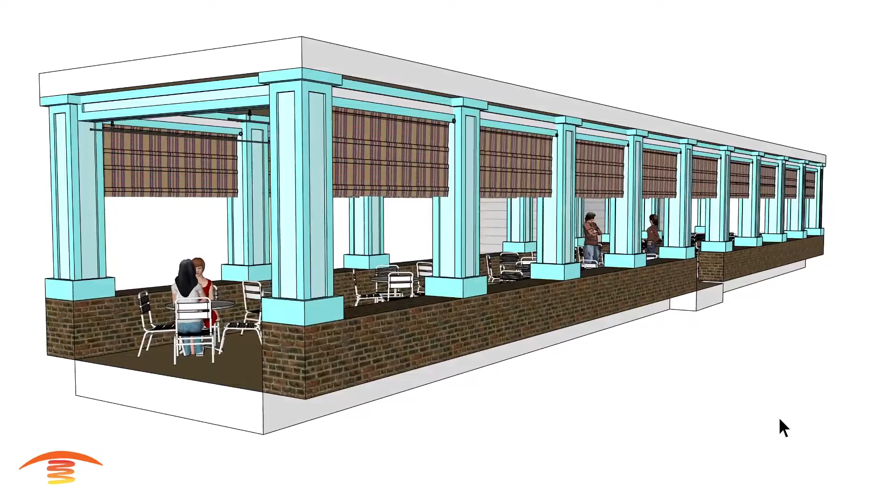Now let's get heating. Alright, so this is a commercial application. You can see this is a restaurant outdoor dining space. We have a couple of things that we want to be aware of. We have some drop-down drapes that come down, and I think it helps protect it from the snow. This is a location back east, and there is snow in the winter time here, and it gets very cold.

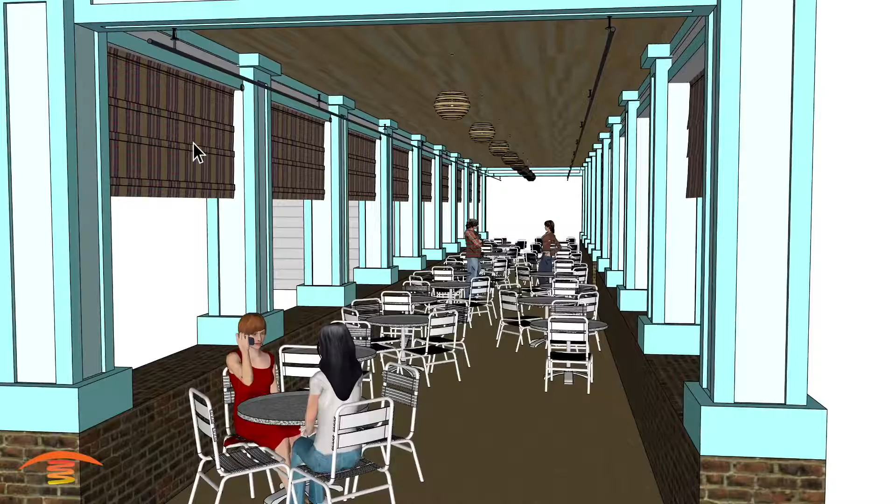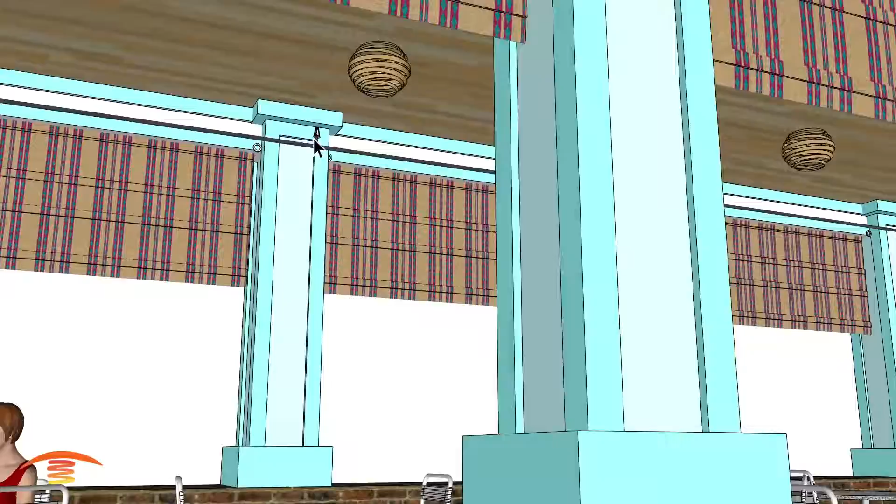So I imagine that this also acts as a source of insulation. We do have some fire retention sprinkler heads up here, and also over here. And then we have some lamps located down the center. My lamps are a little bit different than what theirs actually are. I do have these lamps centered within the post right here. The reason I'm showing that is because they actually might be centered over here, so we would have to just shift everything over.

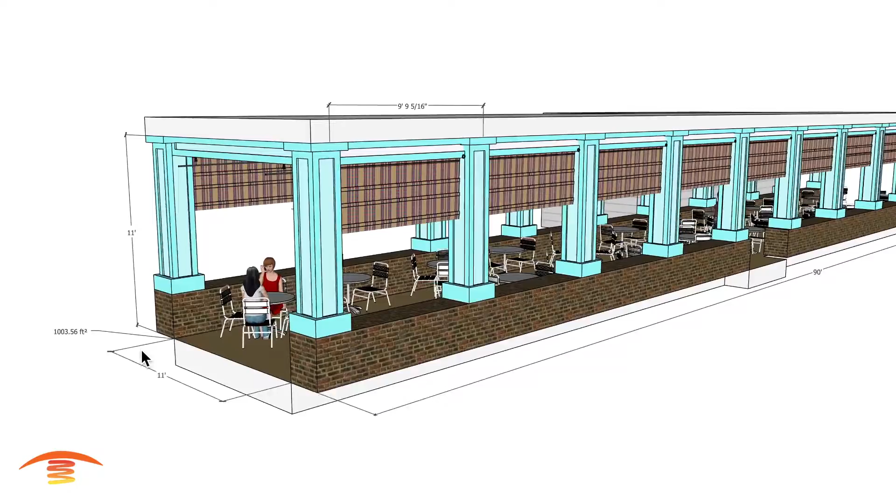Let's go ahead and look at the overall dimensions that I have here. Oops. So overall dimensions I have is 11 feet wide by 11 feet tall, and it's 90 feet deep this way. So it's a total of about 1,000 square feet. When you're heating up 1,000 square feet, you want to do as much as possible with as little as possible. And so my first recommendation is going to be to utilize a gas unit.

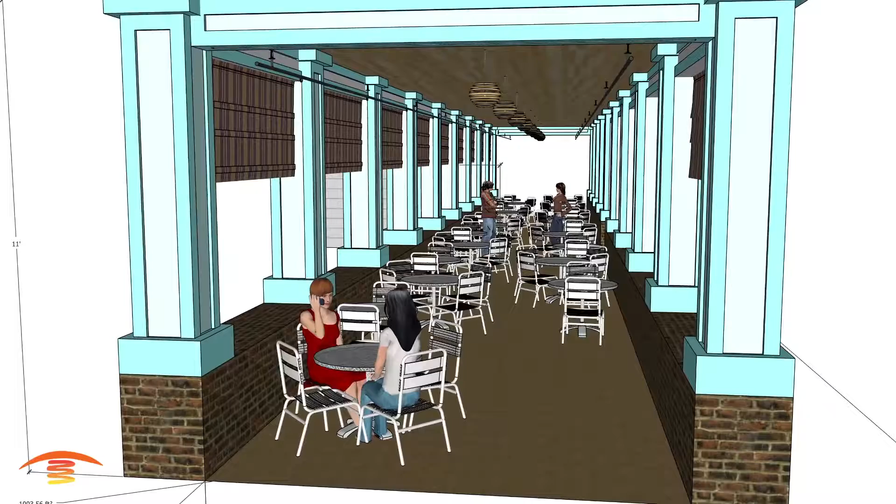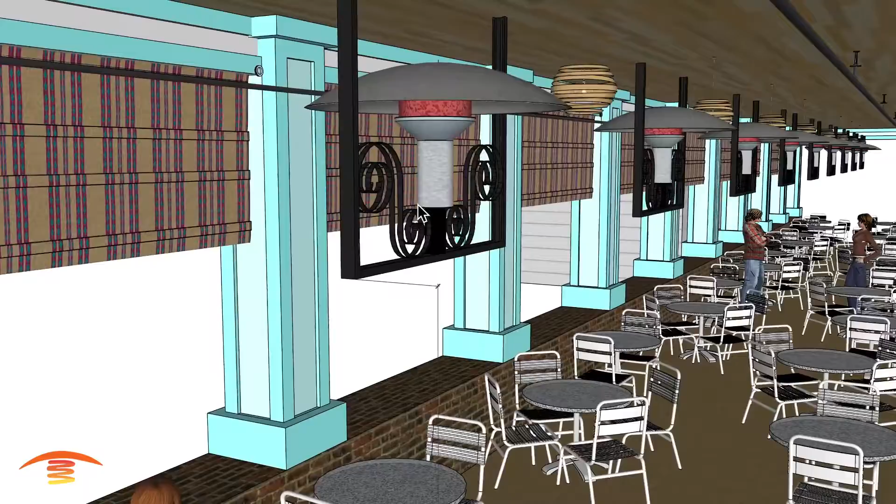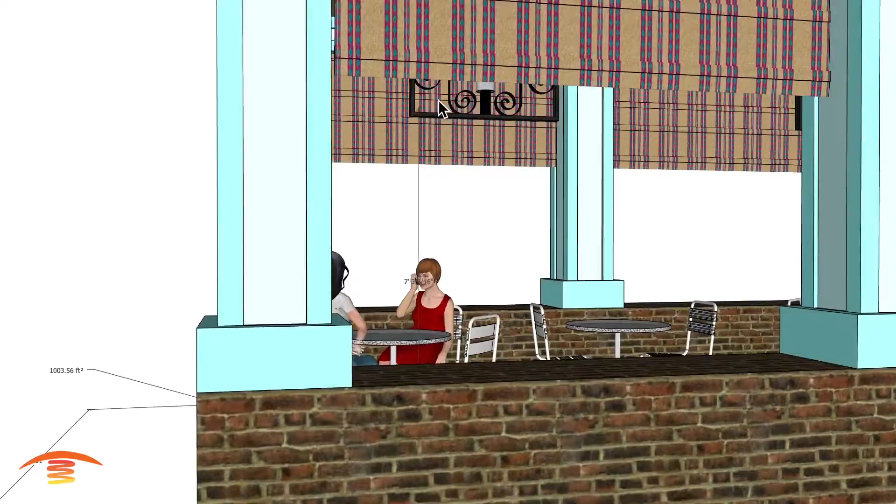The gas unit I'm going to recommend would be called the Infrared Dynamics Sunglow Model A244. It's got a hanging bracket here. It's got some scroll work here, and the bracket I believe is 21 inches down. You are required to have 18 inches above and then 24 inches out on all sides of the heater itself. I did place this marker here just so you can see what the finished height would be at roughly about 7'3.5" approximately off the ground.

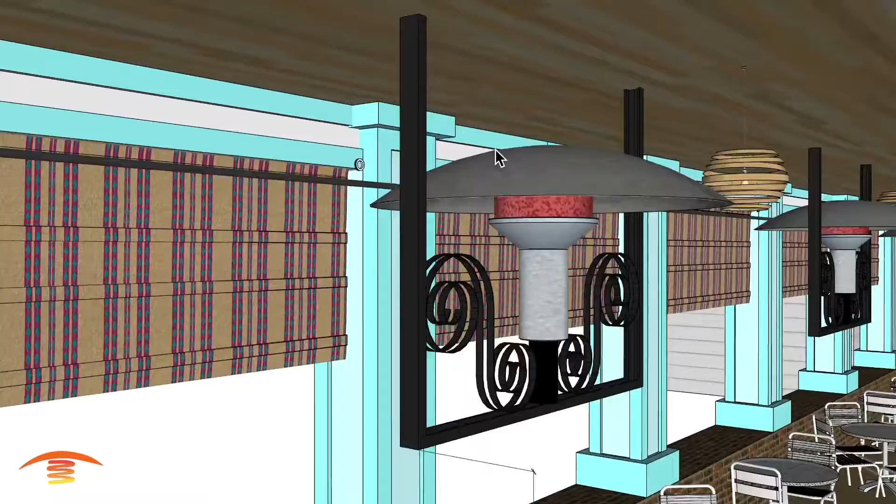And although you see the bracket not touching the ceiling, you would have to come up with your own, like maybe a piece of angle iron that comes up here, bolts to the ceiling, and then bolts to the bracket itself. I think this bracket's about 1.5 inches to 2 inches wide, and I think that's about it. Yeah, so these are 50,000 BTUs.

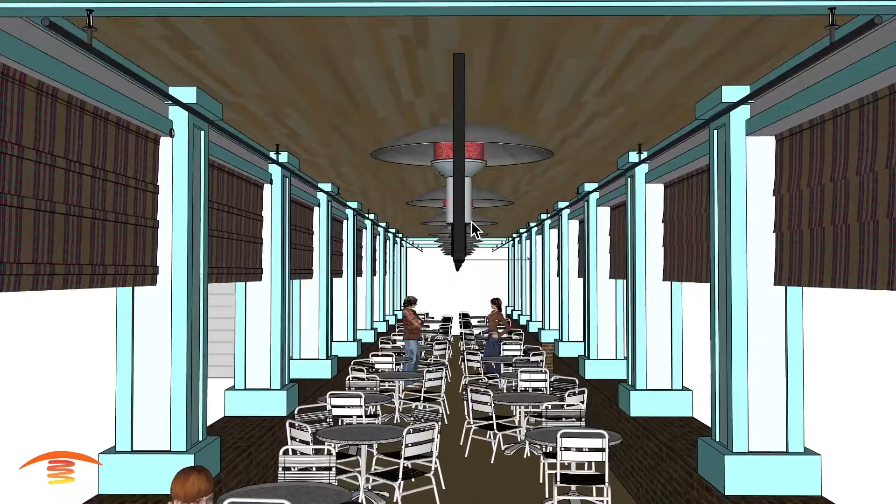This is an A244E, so it has a self-ignition system. You hit a 24-volt switch, the unit comes on, and then it monitors its flame. So if it ever got blown out, it would automatically try to either restart or to lock out. And to reset this unit, you would have to just turn the switch off and then back on. So yeah, it puts out enough heat, so 50,000 BTUs.

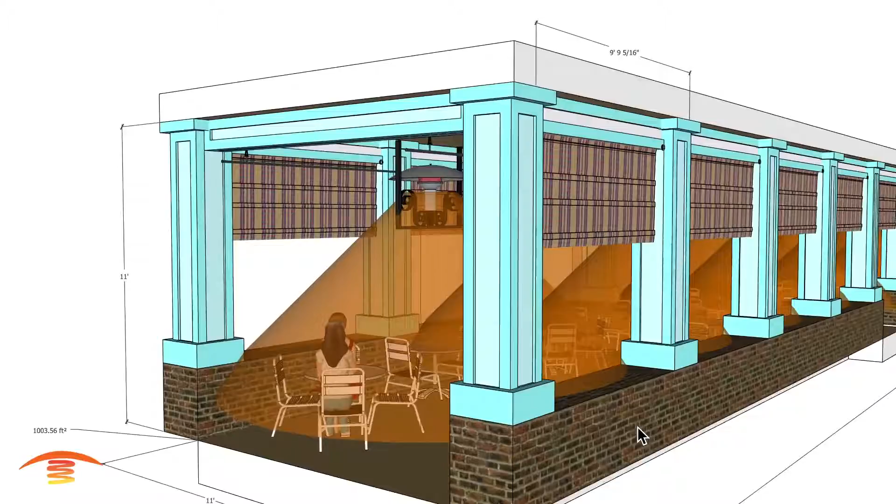You can kind of see here what our footprint of heat would be. It's roughly about a 14-15 foot diameter of heat. And with a system like this, you're going to get a nice coverage through a space like this size. I think we have a total of 9 units here. And I think that would be a great option for an application like this.

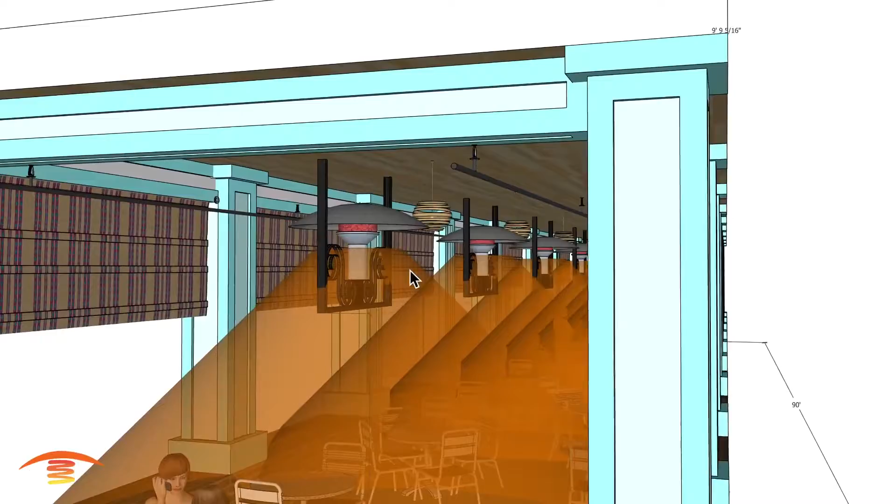Now, one consideration that you'd want to take is the fact that these do have exhaust, so there is a burning flame inside of the emitter grid here. That being said, that exhaust is going to flow up into the ceiling area, and it has a potential of setting off fire sprinklers based on the height of the sprinklers, how much air movement, and whether that exhaust is able to flow out of the environment quickly.

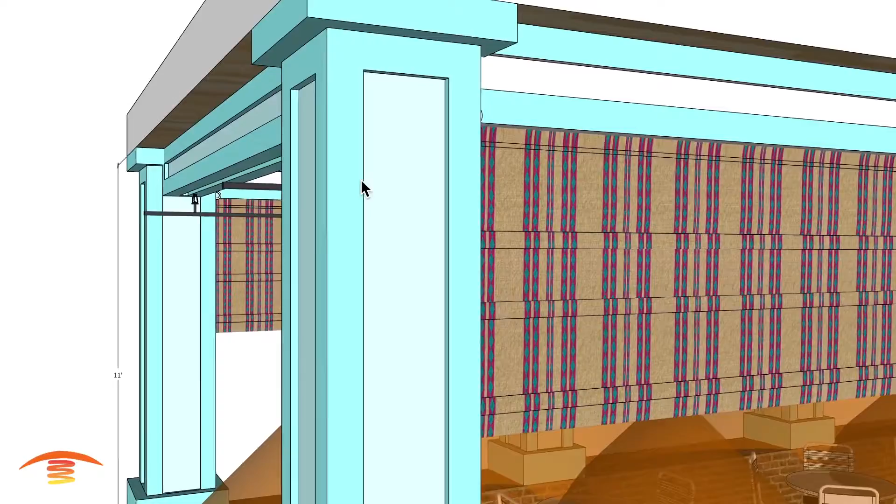It may require some type of ventilation to be placed inside of the ceiling, and that ventilation would most likely have to be mechanically controlled to draw the exhaust gases out of the ceiling area. So that's something to be concerned about and consider, but this would be the best application in my opinion.

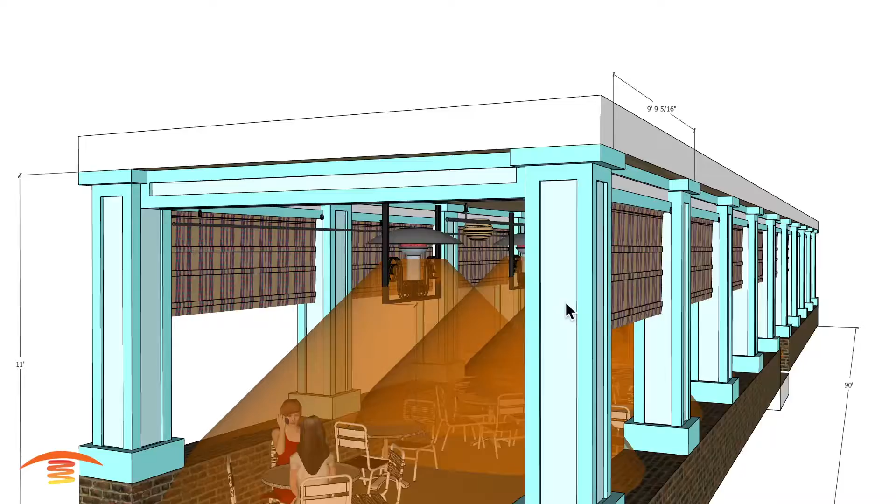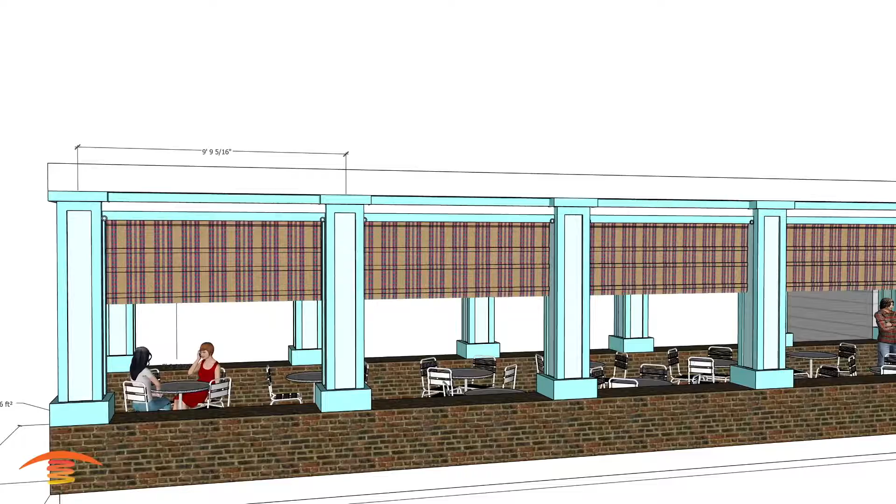All right, let's go ahead and go to the second option. The second option, in my view, would be something of the Sunpak. This again is a gas heater. It has 34,000 BTUs, and this is a TSR. You can actually get a TSH.

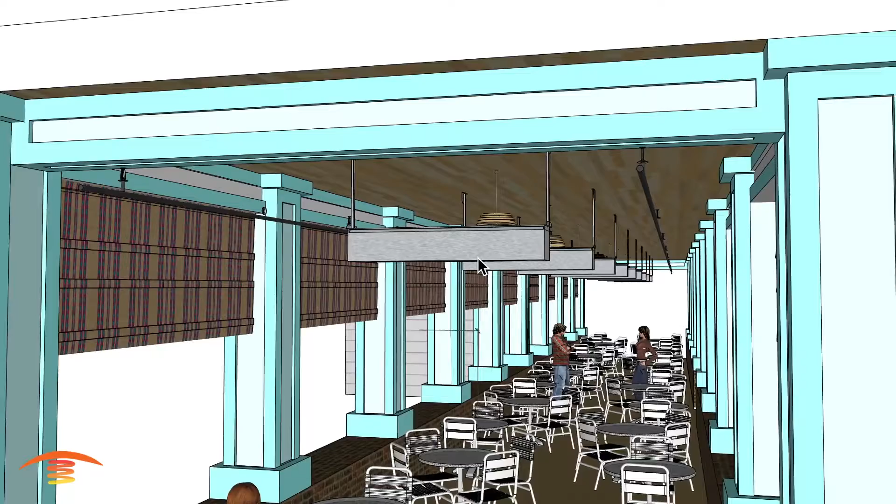You can actually get an S34 as well. It's 34,000 BTU, and the TSH model has a reduced option of 25,000 BTU. So you would hit a switch that would reduce it to, instead of 34,000, going down to 25,000. I have them located in the same place as I did the A244s, centered within this span here, and then centered within this span here.

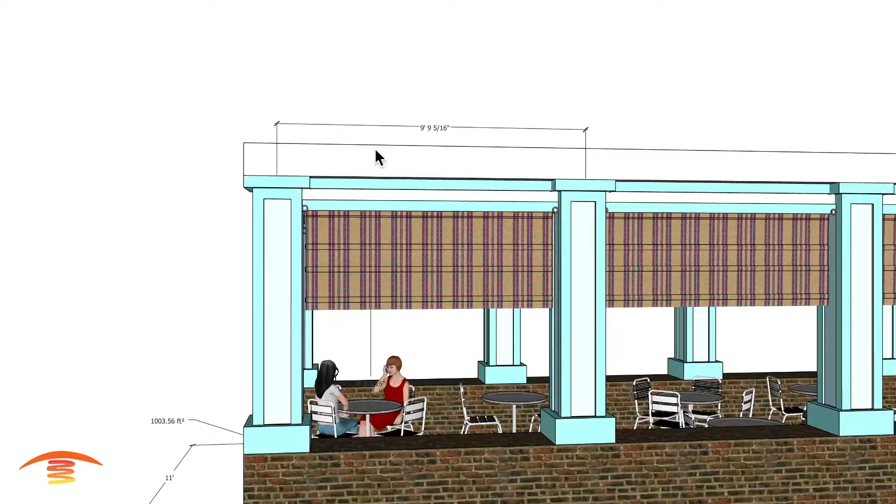If this span, this 9'9" and 5/16 center to center here, if that's a little bit wider, that's going to be okay. If it's, let's say, another couple of feet wider and there's less of these posts, then we would want to kind of make sure that we have the heaters around 10 foot center to center from each other. So just bear that in mind.

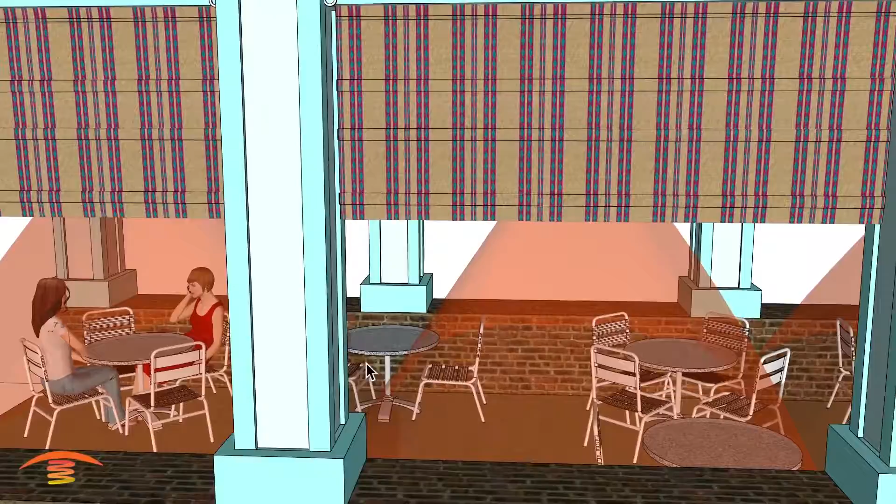Looking at the footprint of heat, you can see that this is a fairly decent coverage. We still are missing some locations here. You can see that there's some missing spots in between some of the heater locations. But it is a decent application.

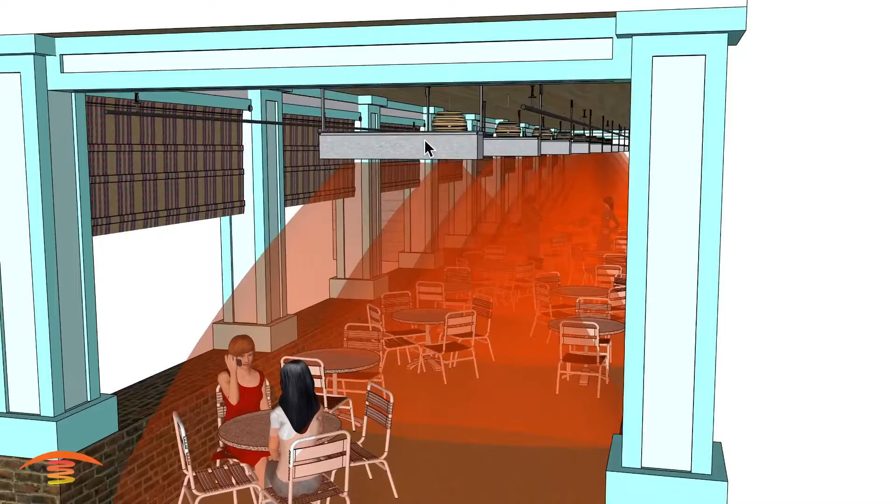And again, speaking of the fire sprinkler system, these are gas heaters. There is exhaust. You want to make sure you have a way to evacuate the exhaust gases out of the ceiling area. And especially when you drop these drapes down, now you're really containing the exhaust gases as much as possible, less air movement.

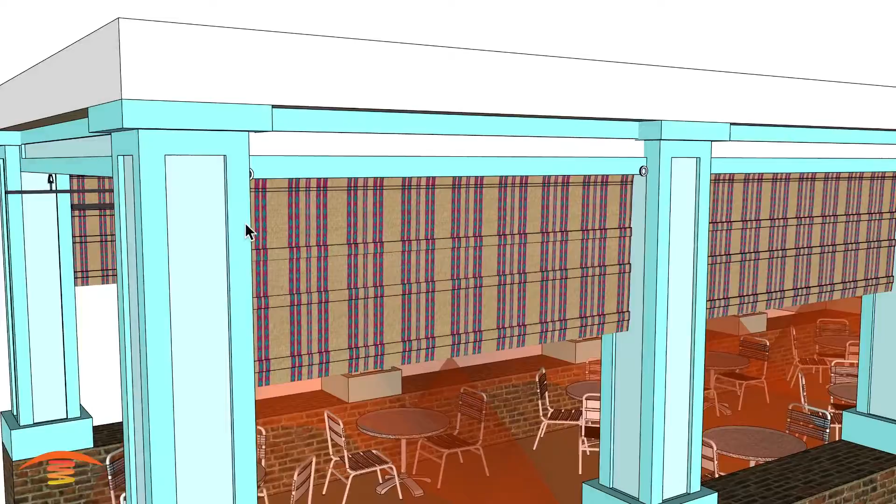I'm sure there's some openings between the drapery and the structure itself, and that will allow exhaust to flow out of there. However, you want to make sure that this area up here doesn't fill up, especially on a calm day where there's no air movement. All right, and so if that would be a major concern, then the last option I can come up with would be to place an electric heater here.

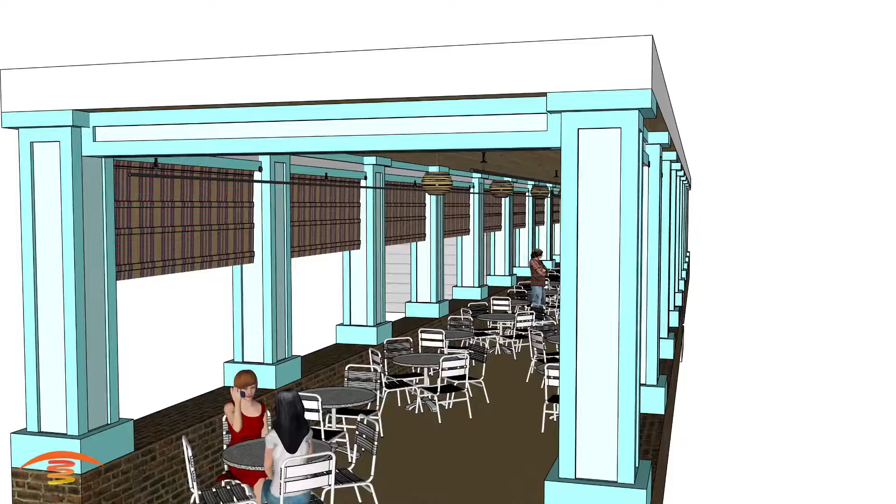And let's see if I have those here. There we go. Okay, so this is an Infratech electric. These are 6,000 watt, 240 volt, 25 amps a piece. You can go one bulb on, one bulb off. You can go with a control system.

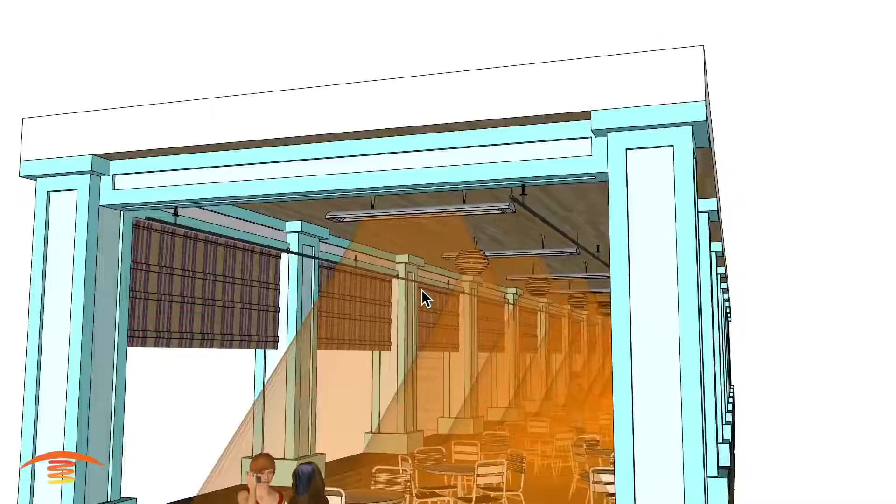Again, I have them in the same locations. We do have some missing space between each one of the heater locations, just like I said before with the Sunpaks. But again, you get a decent coverage, and I would say it would be okay.

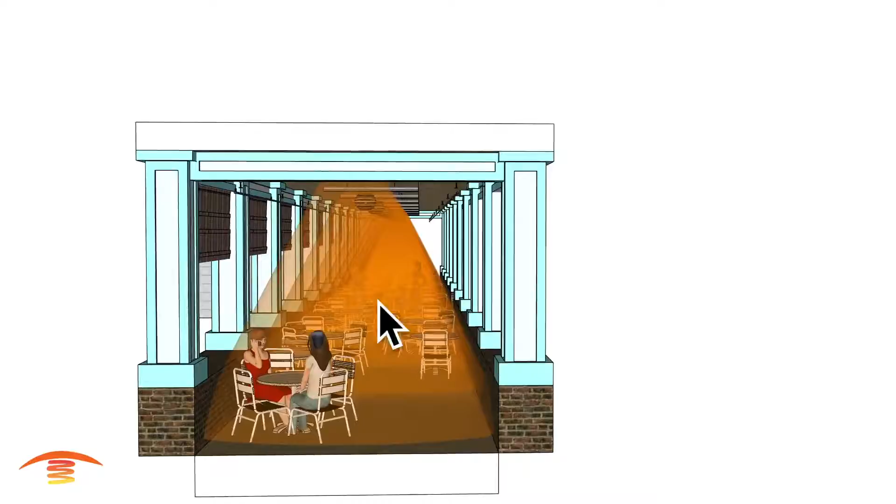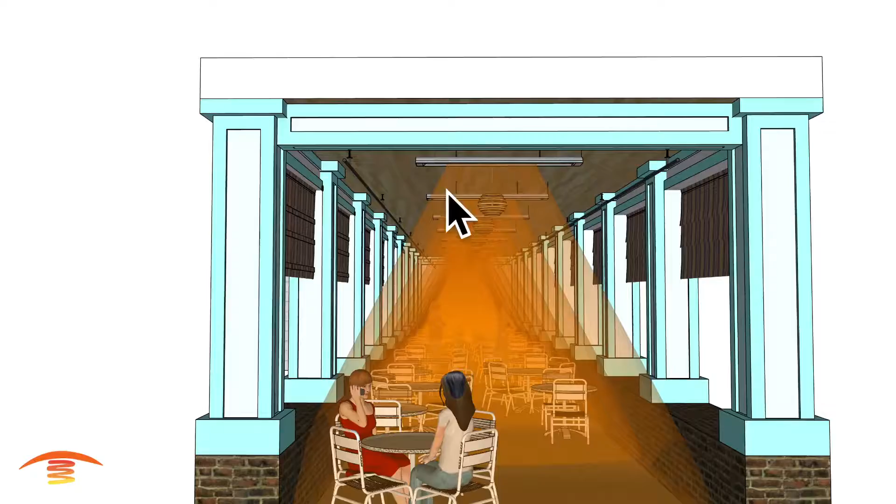Now, we're not going to be able to heat this room up when it's open like this throughout a 50-degree temperature or lower, unless we were able to close this up and retain some of that air throughout the space. There's no exhaust on these heaters, so that might be the best option for this application, being that this is an older structure, and venting up there is the big issue. There's no exhaust vents, so they wouldn't hit the sprinklers and they wouldn't trip. So something to think about.

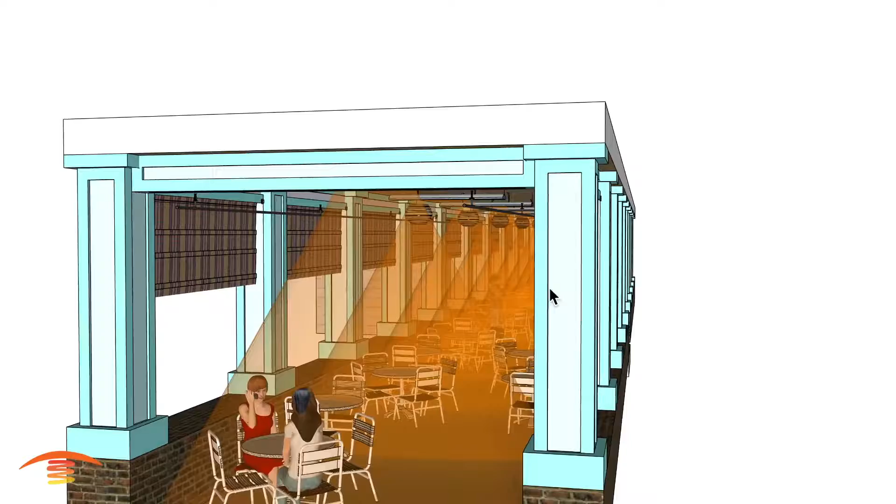Now, it is a lot of power, same amount of units. 9 units would be 225 amps on a 240 system. So that's a lot of power. But if it's a windy area, or an area that you just can't ventilate, then this would be a really good option for that.